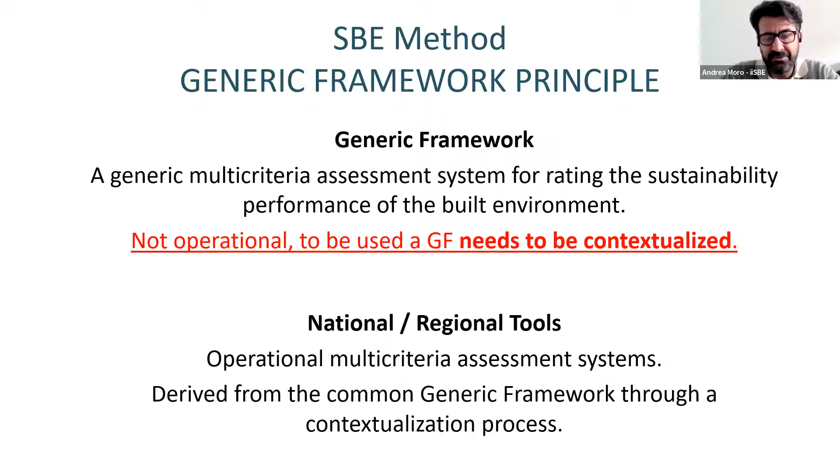So the principle is we start from a common basis, for instance the Sustainable Building tool global, and through the contextualization you can create local versions. This kind of tool, generic framework, has been the origin of several assessment systems used in Europe. For instance, the Italian public assessment system for buildings, named Protocollo Itaca, is the adaptation of SB tool to Italy. And today it is also a national standard. It is a UNI standard. UNI is the Italian standardization body.

We have also a Spanish version that is named Verde, coming from the same root. We have a version in the Czech Republic. We have a version in Portugal. There was also a version in Austria, for instance, and in other places. I told you it was a global approach, a global research process. For instance, the national Japanese assessment system, CASBEE, is based on SB tool, is a cousin of those ones.

So you start from the generic framework, and to create your specific tool, you have to carry out a contextualization process. Basically, the contextualization process can be reduced to three main steps. First of all, you select from the generic framework the assessment criteria that you want to apply locally. The generic framework contains 100 to 150 criteria and relative indicators, and you will never use all of them in your tool. So the first step is to select the ones that are the most significant in relation to your context. Usually an assessment tool is composed of 40, 50 criteria maximum. If the tool is too wide, too big in terms of number of criteria, you risk having a system not really manageable.

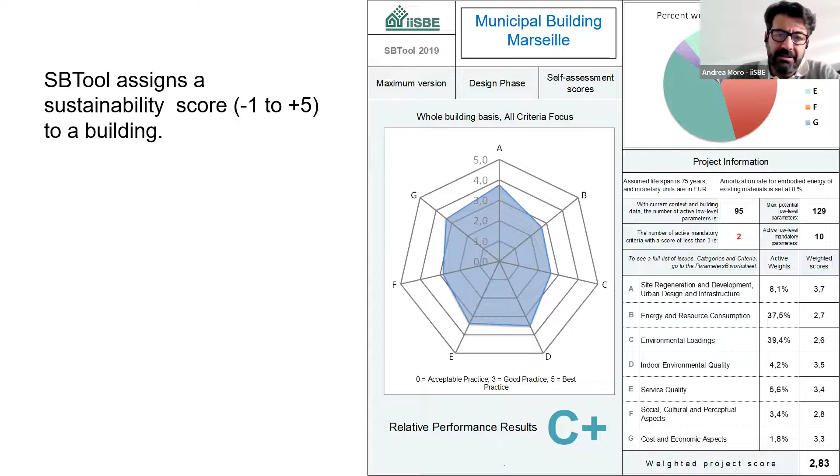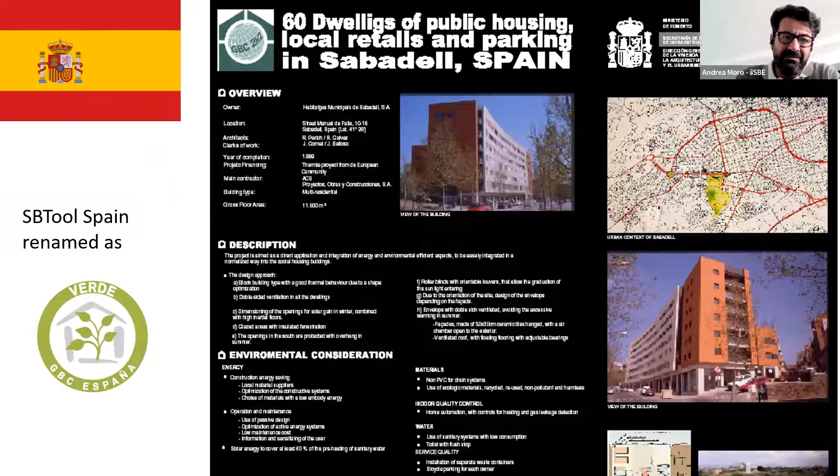And over time, the system has been tested in different countries, and also this methodology contributed to the development of other rating systems, like in the US with LEED, or in France with HQE, etc. So it has been tested in really many different situations, many different kinds of buildings.

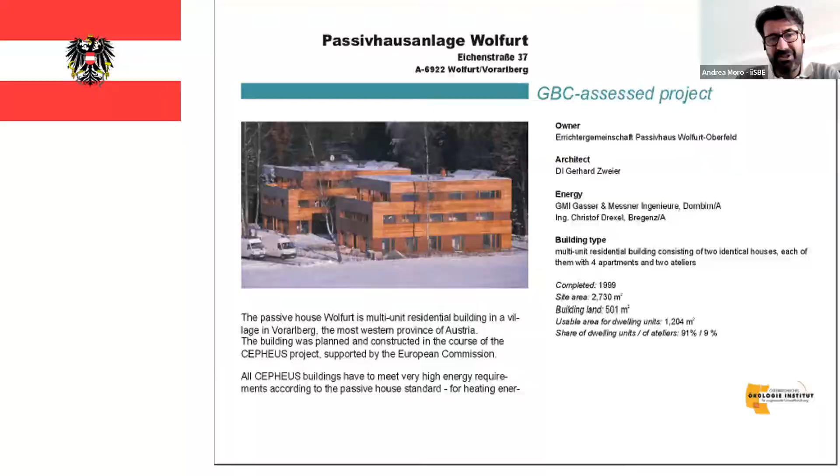So how does this methodology work? Basically, a generic framework, and we have produced in Sustainable Med Cities 3 generic frameworks: one at building scale, SB tool, one for neighborhoods, SN tool, Sustainable Neighborhoods tool, and one for cities, SC tool, Sustainable Cities tool. So each of those generic frameworks has a modular structure.

So the criteria, the assessment criteria, are grouped under different issues, and the issues are usually coded with a letter, A, B, C, D, etc. And issues represent general topics that are relevant when you are assessing the sustainability of the built environment. Each issue, so each module, A, B, C, D, contains categories. In the categories, we have criteria, and each criterion is connected with an indicator. The indicator is what you are going to measure for assessing the performance of the building, neighborhood, or cities.

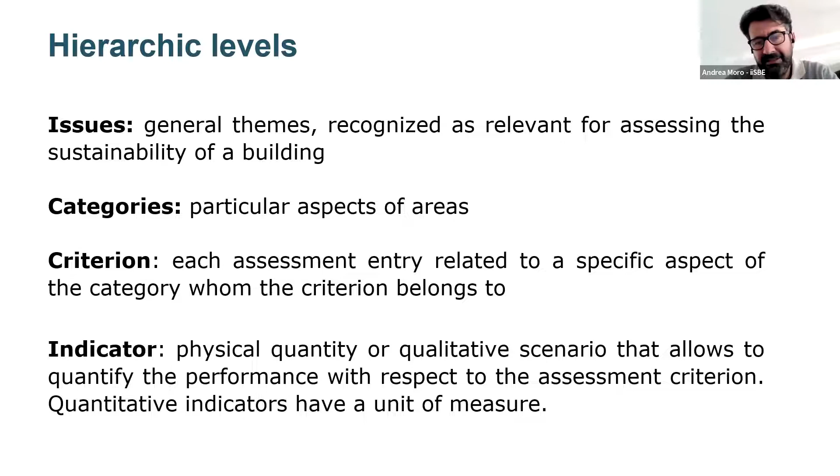For instance, a criterion could be daylighting, and the indicator could be the daylight factor, so the ratio between the quantity of natural light you have inside the building and outside. Or another criterion could be permeability of land, and the indicator is the share of the land that is permeable on the total area of the land, and so on. So this is a visualization of the hierarchic levels. You have an issue, you have several categories. Categories contain criteria, and criteria are all linked with an indicator.

In the building scale tool, we have 8 issues. You can see them in the table, dealing with the site, the energy, the environmental loading, the environmental quality, service quality, social, economic aspects, cost and economic aspects, adaptation to climate change. So each of the 8 issues contains different categories. And the different categories contain criteria. In total, there are 80 criteria in the building scale tool, and 17 key performance indicators.

What are the key performance indicators? I told you before that when you are producing your local version, you will select, for instance, the criteria among the 80 in SB tool, if we are producing an SB tool for a specific region. But of the 80, 17 are mandatory. So you must include them in your local version. This is because those 17 are significant, they are relevant for any context, and they are the ones linked to the global common challenges like the SDGs, the Sustainable Development Goals, or the carbon reduction goals, and so on. So they are surely relevant in any context. Then you can add as many as you want. 17 is the minimum number of criteria in a tool.

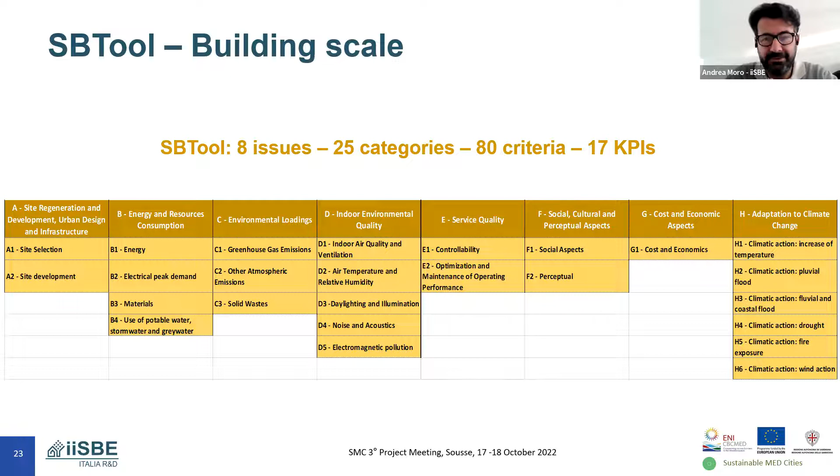The SN tool, the neighborhood scale tool, has in total more criteria. They are 133, 10 issues, 43 categories, 14 KPIs. Of course, we are at a higher spatial scale, and of course, the number of topics, themes is larger than the simple building scale. And then we have the city scale tool. Here we have 10 issues, 99 criteria, and 10 key performance indicators.

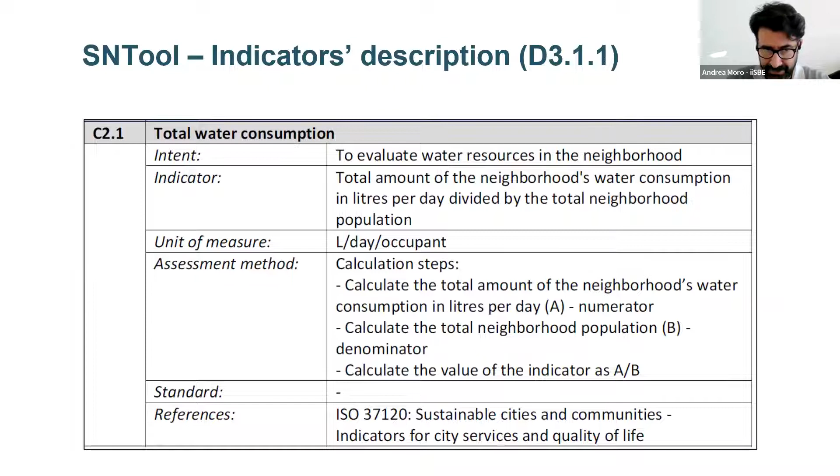For instance, if total water consumption is one indicator in your local SN tool, you are going to apply the calculation steps, and you are going to calculate the liters per day per occupant, that is the mean water consumption in the neighborhood. And the same you could do with, for instance, the concentration of PM10 or the final thermal energy consumption for building operation. You are going to calculate the values of each indicator that has been included in your tool.

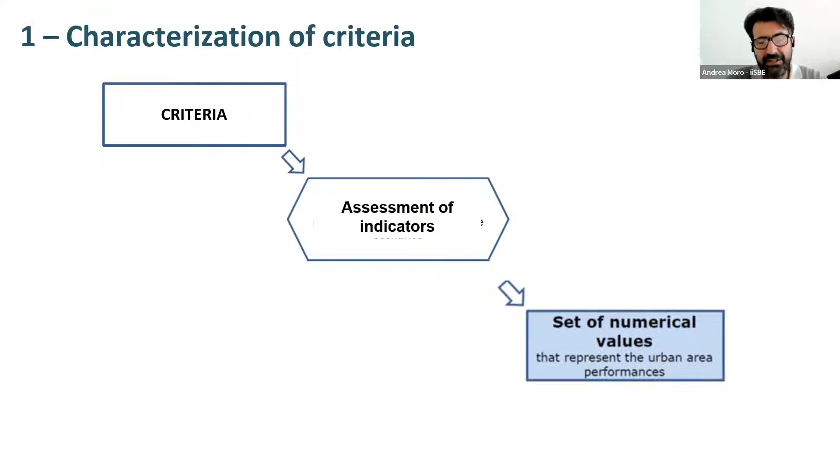And at the end of this process, you will have a set of numerical values. You will have kilowatt hours, cubic meters of water, kilograms of CO2. So you will have a set of numerical values with, of course, different units of measure. Like in this case, you have 3 different criteria with their indicators, and the final result is a percentage, days per year, kilowatt hour per square meter per year. So depending on how many indicators you decided to include in your tool, minimum the number of KPIs, maximum what you decided, you will have a set of values. And

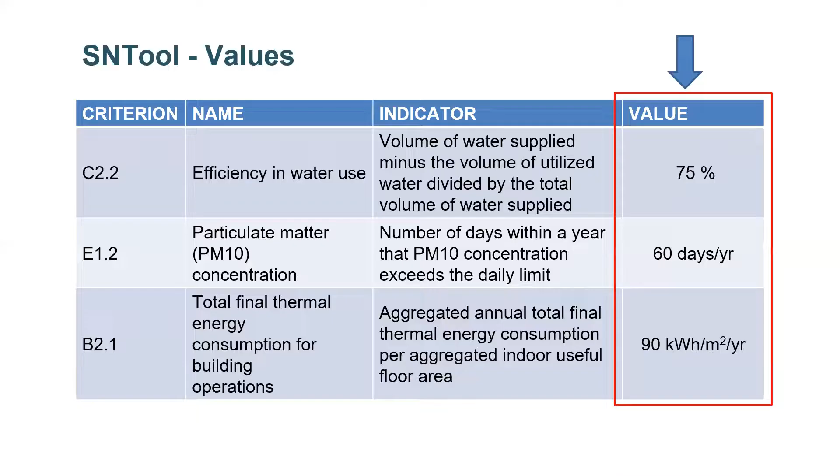Andrea, can you hear us? Yeah, okay, do you hear me now? Yes, now we can hear you. We had some issues. We couldn't hear you for a little bit. Yes, sorry, because it could happen again. Don't worry, because we just moved office this morning, and we have some little troubles with the connection. It's okay. I was just worried maybe it was my connection. So yes, of course you can continue. It is mine, but it could happen. So don't worry. I will be back in a few seconds.

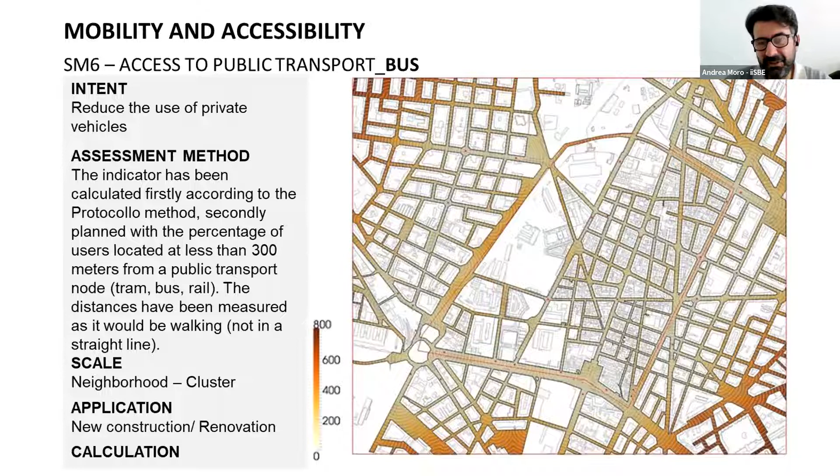The city in the world with the higher value is Venice, for instance, in Italy. Or it could be the proximity of transportation or stops, or, for instance, the mean value of the albedo in an urban area. So this is something linked to the heat island effect.

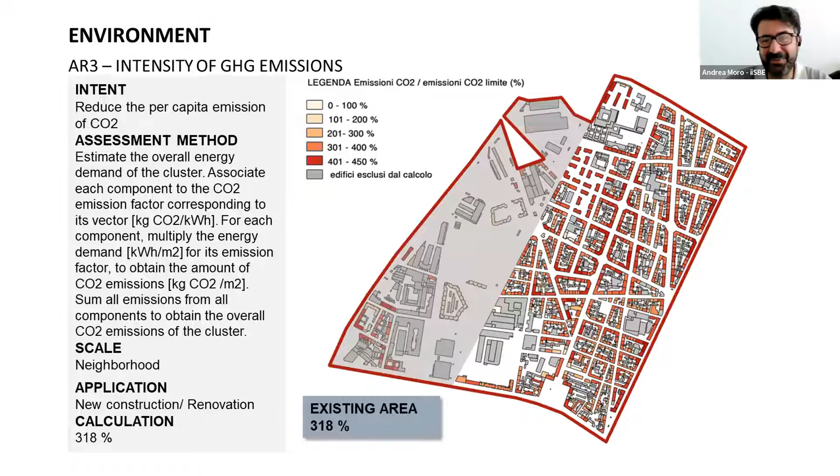These are a representation of the mean consumption of primary energy for heating in the urban area. These are the CO2 emissions. Again, the darker the color, the worse the performance for the different buildings. We can have also economic indicators and so on. So after the first step, we have a set of values.

Now it's clear that we are talking about a multi-criteria assessment system. So it means that we must combine the values of the single indicators to have a global evaluation. So the next step is normalization. It means that in this step we associate a score to the value of the single indicators. And the score ranges between -1 and +5, as I told before.

So what we are going to do is, let's say, rescale in this interval, -1 to +5, all the different indicators, associating a score, so eliminating the unit of measure. And we use normalization functions to do it. We have different kinds of normalization functions. Basically, high is better or low is better. Higher the value is better, for instance, the permeability of land, or low is better, for instance, the CO2 emissions. So it depends on the kind of indicator.

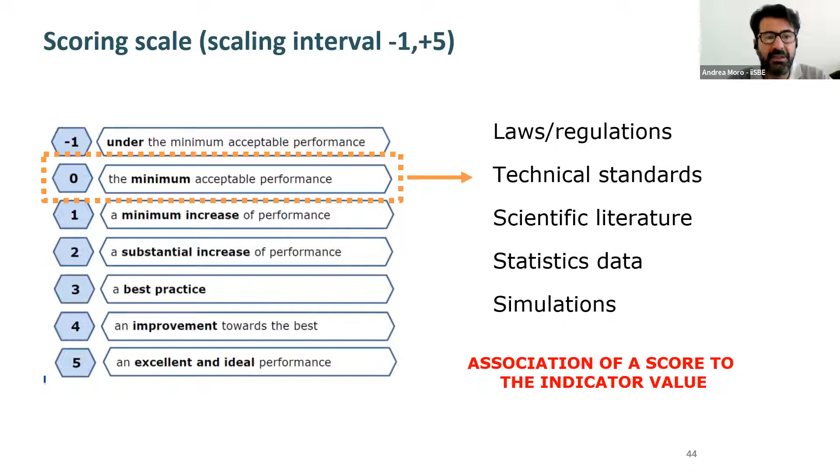And this is something that is done locally, because the minimum acceptable performance is defined in relation to your local laws, regulations, technical standards, maybe statistical data, or maybe scientific literature, simulation, and so on. So this is a very important part of the process, where you are setting the performance scale. Because at the end, the score that you achieve at the end of the assessment is the performance of your building or neighborhood or city in relation to the minimum local acceptable performance.

And as I told before, we have 3 different normalization functions. High is better, lower is better, but we also have a qualitative normalization function, applicable to the qualitative indicators. So this is, for instance, the representation of the higher is better normalization function, where on the horizontal axis you have the indicator's value, and on the vertical axis you have the score, -1, 0, 1, 2, 3, 4, 5. So when you are defining the scoring scale for an indicator, you just say, this value of the indicator corresponds to 0, this value corresponds to 5, and so you have a linear normalization function.

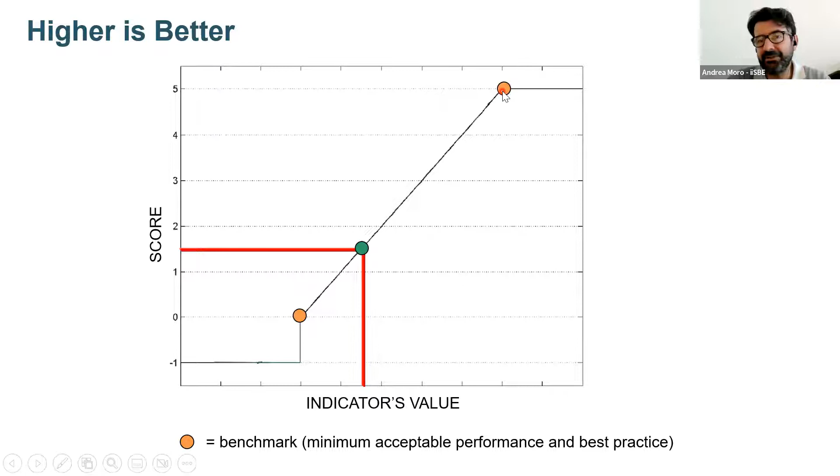And in the moment you calculate the value of the specific indicator, through a simple interpolation you will get the score. So using this normalization function, you will associate the score to the value of the indicators. If the value of the indicator is worse than the level 0, you get a -1. If the value is better, in any case you will have a flat function here, so you will get 5 points. It's not possible to take more than 5 points.

This is an example with the connectivity of the street network that I showed before, where the level 0, the minimum acceptable, is 50 intersections per square kilometer. The optimum is 180. This is the typical number of intersections in the center of a medieval town in Europe that is usually pedestrian. So if, for instance, you calculate in the first phase 90 intersections per square kilometer in your urban area, you get a score of 1.5. These normalizations are done automatically by software, as I will show you later. This is the lower is better function. In this case, it is the opposite of before.

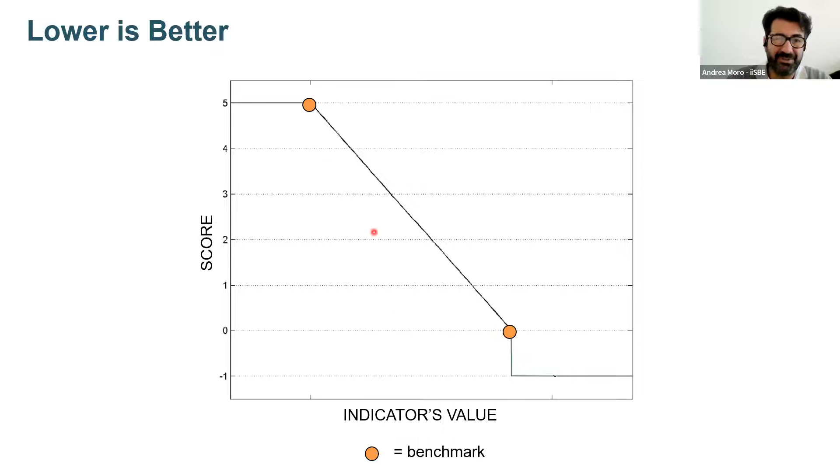So you define a value for score 0 and a lower value for score 5, again with a linear function. This could be the case for energy consumption, if the indicator is the energy consumption of the building or neighborhood in relation to the maximum allowed consumption.

This is usually defined by an energy regulation, so you can have a situation like this: 0 is 100 because the minimum acceptable performance is that you consume the maximum allowed, and maybe you decide that 5 is 25%. So if you consume 25% or less, you get 5. In your evaluation, say the indicator's value is 60, through interpolation you are able to calculate the score.

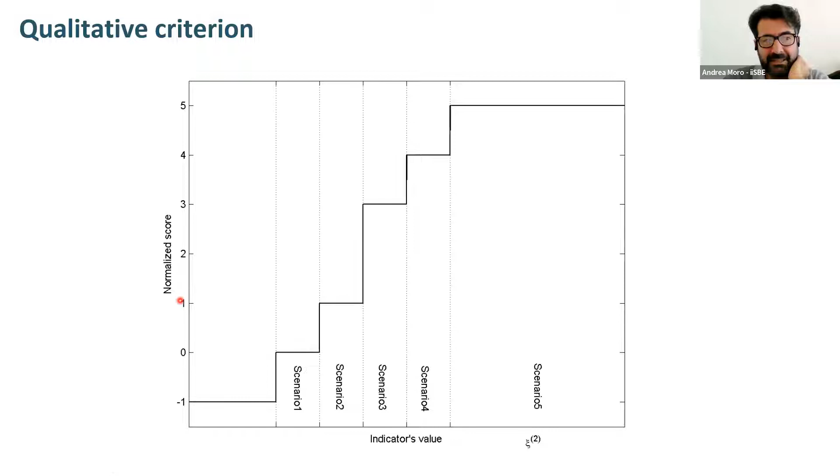This is the case for qualitative indicators, which are described in terms of scenarios. You just have to identify which scenario better fits your situation and assign the corresponding score. This is much less objective than a quantitative evaluation with indicators, so we try to minimize the number of qualitative criteria in the frameworks.

Finally you have the aggregation phase, the third step. First we calculated the value of the indicators, the characterization. Then we normalized the value of the indicators, and now we have a set of scores. Now it's time to aggregate the scores to produce the final score, the final evaluation.

This happens through weighted sums. Here we have a new element coming into play, the weights. So in this phase, by assigning the weight, it will be possible to aggregate step by step the different criteria.

The aggregation takes place in three phases. First, you aggregate the criteria to determine the score of the category. Then you aggregate the scores of the categories to get the score of the issues. Finally you aggregate the issues, and then you are able to calculate the final global score.

So this is in principle how it works. For instance, in this example we have a category, B3 Land, that includes 7 criteria: B31, B32, B33, etc. In the normalization phase, we defined a score for each of them - for instance B31 could be 1.5, B32 could be 2.4, etc. Now it's time to calculate the score of B3.

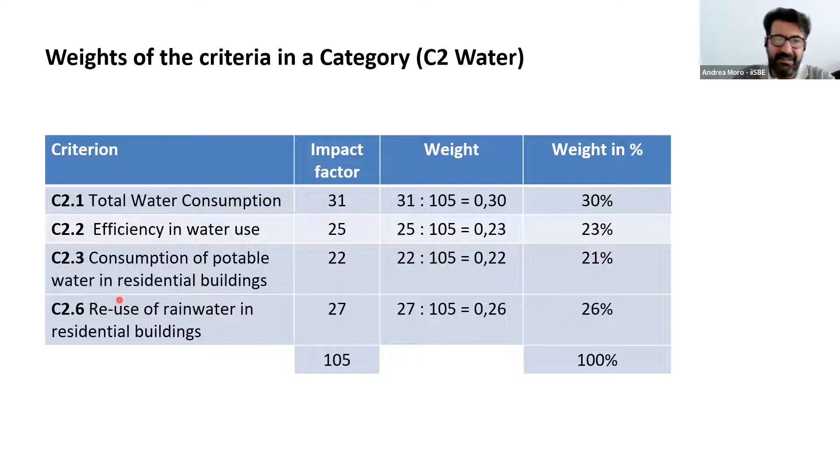When we move at the category level, at this point, how it works, basically, you assign a priority score directly to the different categories. So what is the importance of water infrastructure in regard to water consumption, in regard to effluent management? The priority ranges from 1 to 5, where 1 is low and 5 is maximum. In this way, you are able to set the weight of the different categories.

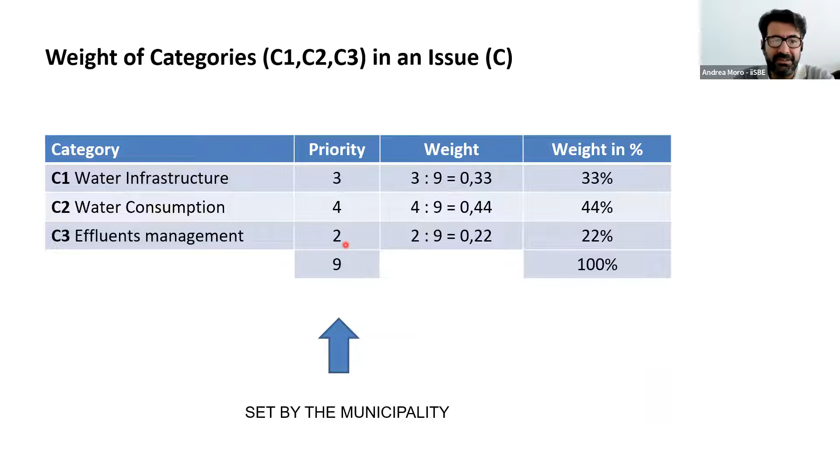So it is the city, the region, for instance, that sets the priorities, because priority is something local. It's up to the user of the system to decide the relative importance of the different issues. So here we also have a very political influence, because when you set priorities, you are taking a political choice. But of course, your choice depends on your local context, your local priorities, or your local urgencies.

So each user, in our project, each municipality, is defining its own set of priorities for the issue level or the category levels, and also the cities are deciding if an adjustment factor is applicable to the criterion level.

Concerning the scoring, let's start from the category level. This is a category, the water consumption category, C2. There are, for instance, 4 criteria selected by the municipality. 1, 0.5, 1.3, 0.1 are the scores calculated in the normalization phase. These are the weights defined, and then you just calculate the score times the weight for each criterion, so you have a weighted score. You sum the weighted scores, and you have 0.73 as the score of category C2, water consumption.

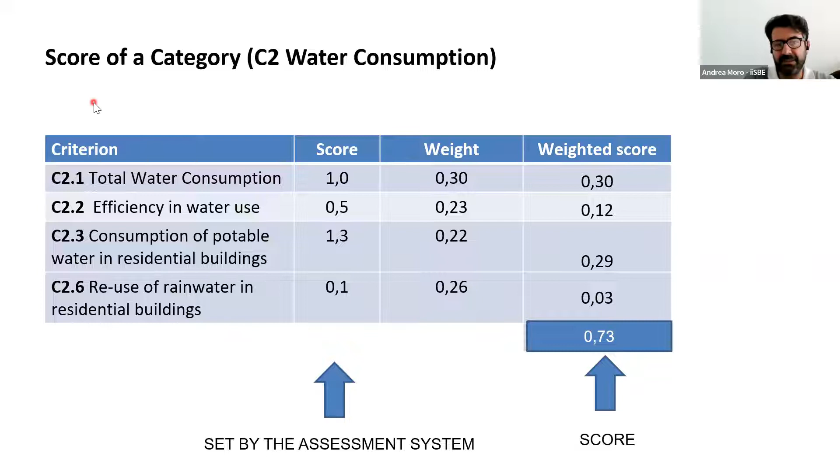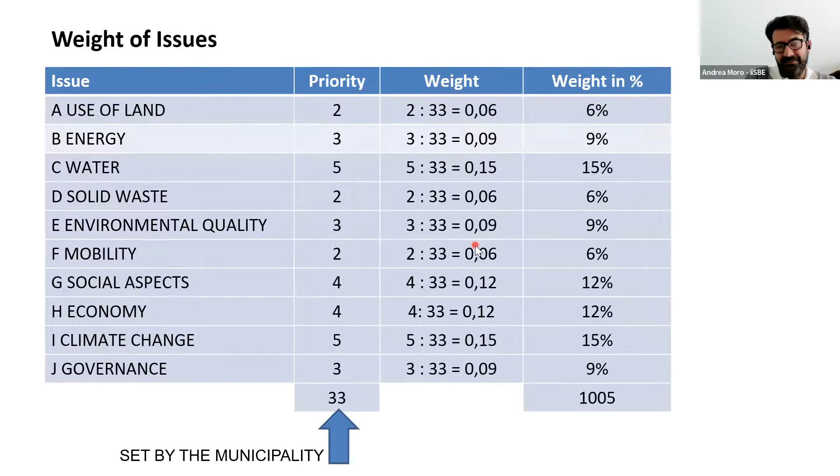In the same way, you will have the scores of the different issues. Each issue has a weight, which we have defined before. Then you have score times weight, giving the weighted score. You sum the weighted scores, and you have 1.8. This is, for instance, the level of sustainability of this neighborhood with regard to the benchmark, weight, and criteria that you have decided to use.

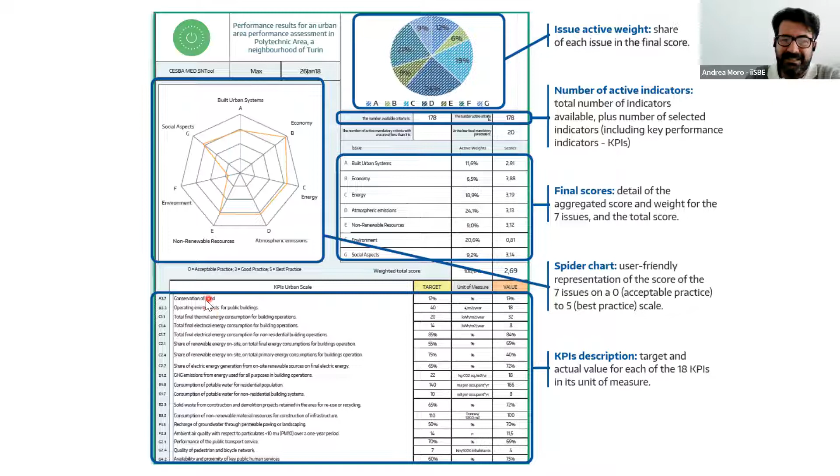Also, these steps are performed using a web tool that makes it very easy to do, so in the end you get the final score. You have an output with the scores of the different issues. This list shows the KPIs, but I will come to the KPIs in a minute.

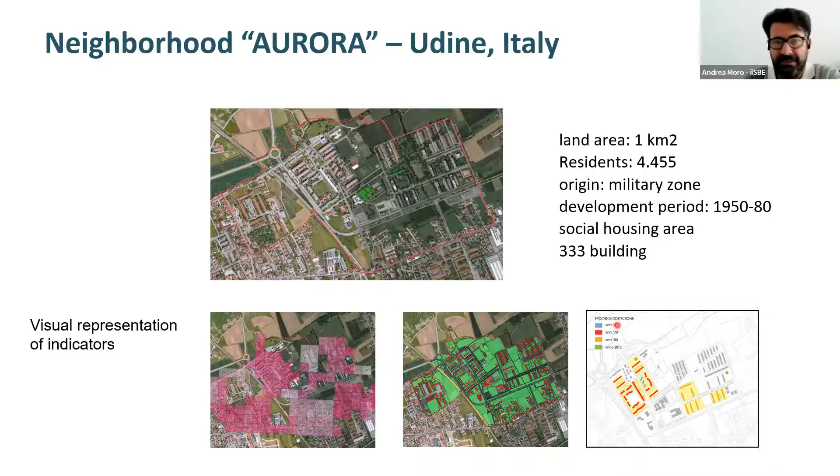In the CESBA MED project, the system has been applied to several different neighborhoods to identify the best retrofit options. I'm going to tell you about the use of the tools in this decision-making process in the second part of our meeting. The tool has been very useful for cities, for instance, to evaluate the actual performance of a neighborhood, to fix performance targets, and to evaluate possible alternative scenarios for improving the sustainability of the neighborhood.

This kind of process that I described for the contextualization phase - the selection of criteria, fixing the benchmarks, and then fixing the weight priorities - can be done through a participatory approach. If it's only the municipality or some decision-maker that decides the criteria, priorities, and benchmarks, this is a top-down approach that isn't really good. In our projects, we push for a bottom-up approach, through what we call project committees.

Here you see a couple of pictures. Through this participatory approach, the selection of the parameters has been based on public criteria. Also, the definition of benchmarks and priorities were fixed through public consultation, so that in the end, the assessment system really reflects the priorities of the community living in the neighborhood.

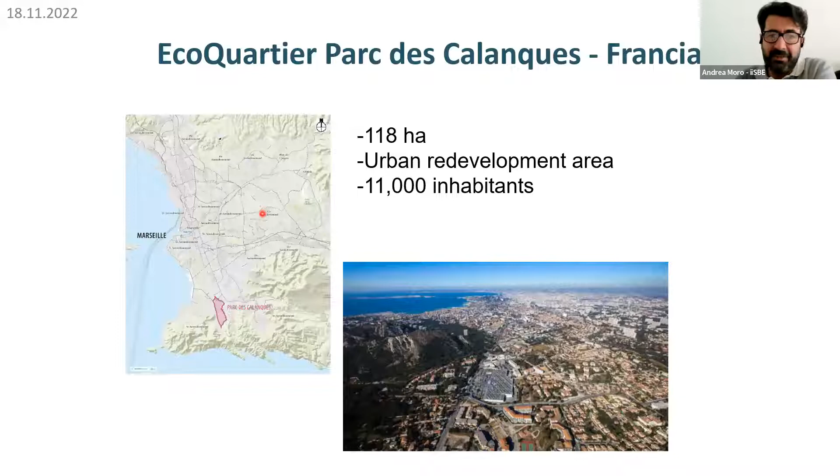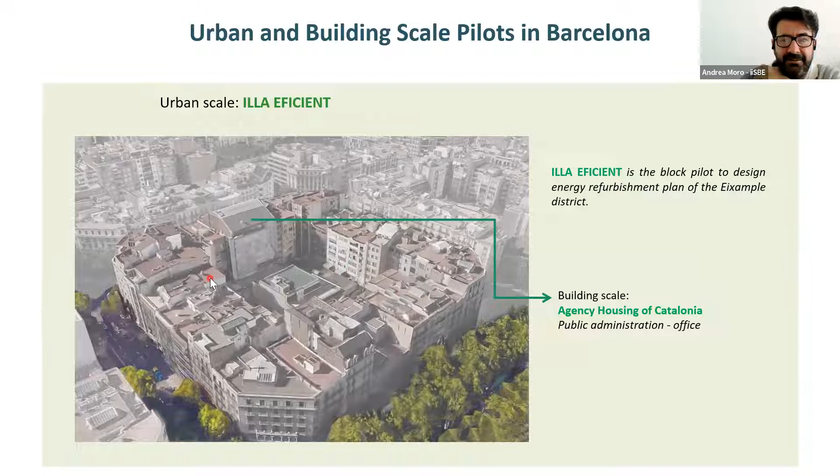In Barcelona, we had an application at a small urban scale, also on a cluster. In this case, it was a block where there is the Agency of Housing of Catalonia. The tool was used to identify the strengths and weaknesses of this block.

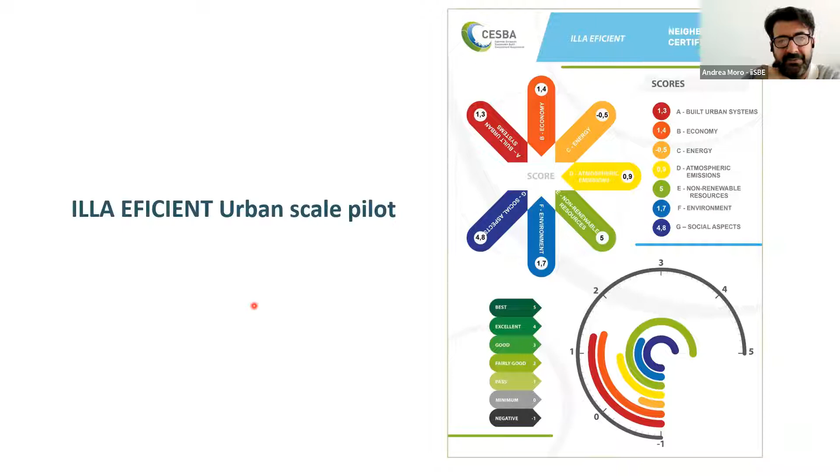And also to define a pilot concept for the improvement. Another case study was in Catalonia, Sant Cugat del Vallès, where the municipality applied the system on a huge urban area. They were evaluating two possible scenarios, and for each scenario they evaluated the results in relation to the targets fixed by the municipality.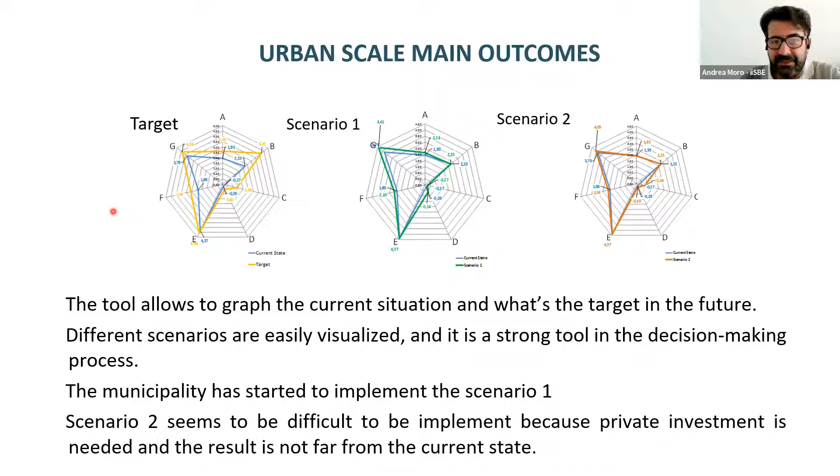So these are very powerful tools for supporting the decision-making of a municipality in urban retrofitting. At the urban scale, the complexity of decisions is very high - the variables are many, the stakeholders involved are many, so it's very complex. You need a multi-criteria system like this one to support your decision-making process, providing objective, reliable information to understand the situation and which scenario can have the best impact.

We also had an application in Greece, in the SESMA-MED project, and also in the Sustainable Med Cities project, the NECBC MED one, the current one. In reality, we are using the systems combining the building and the urban scale.

So we ask the different municipalities to prepare a local version of the SB tool for the buildings and the SN tool for the neighborhood, then to select a neighborhood and one or more public buildings within it, and then to define a concept for the retrofitting of the neighborhood that creates a synergy between the building and the neighborhood scale.

Because, of course, the building-by-building approach isn't winning. You could have a bad building, like a school built in the 70s, that is very weak - you can't improve it too much. Maybe you should demolish or reconstruct it, but maybe you can't. At that point, maybe you can exploit possible synergies with buildings in the same neighborhood that maybe can transfer

renewable energy produced by solar panels or PV panels, or create synergies not just in the energy field - it could be in transportation, water, or whatever - so that the building can really reach a higher performance with this urban scale approach.

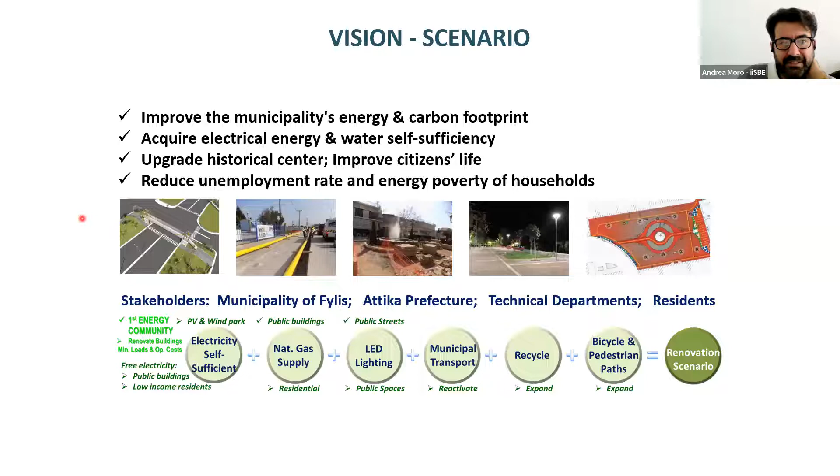So in this case, each partner works on different scales, always defining through the analysis the current state, identifying the weak points, and then finding the best retrofit scenario.

Before opening the floor to your questions, I hope I tried to be as clear as possible. I know it's a complex topic, but if we go

to the platform - this is the beta version of the assessment system. Basically, if you decide to use this assessment system in your project, you will have credentials to enter this system. You can at this point open any of the modules. Just a second, I have to log in. Okay, here we are.

So once you enter the system, here you are able to visualize the available generic frameworks. We have here the ones produced in the SESMA-MED project, for instance, but we also have the new ones produced in the Sustainable Med Cities project. SMC stands for Sustainable Med Cities.

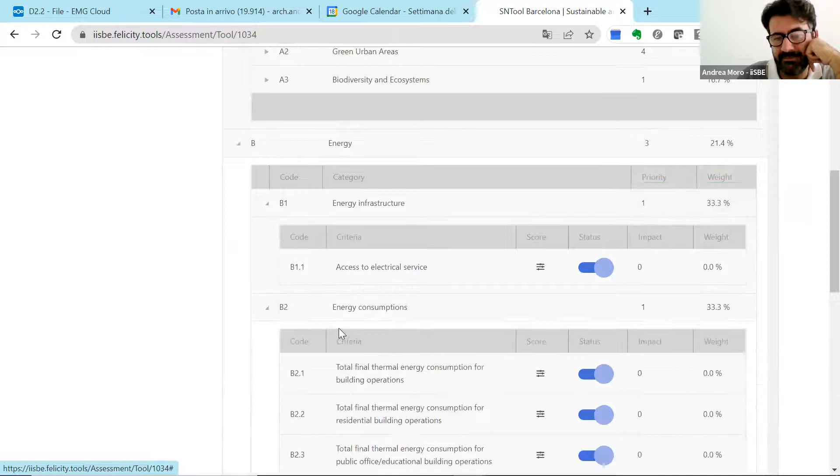No, it's possible. It's possible to eliminate a category in the moment you are not activating criteria. I can open any of the categories here, and you can visualize the criteria inside them. So I have to deselect the criteria in order to remove the category? Yes. Okay. And this is the second exercise.

So when you are inside the category, like here, we are inside B2, here you decide which parameters you want to include or not. And also again, here you can introduce those impact values that we have calculated. So it was the intensity, the duration, the extent, if you want to use a more objective approach. If not, you can just have another co-creative approach. You can decide just to use 1 to 5 again as priority, and you can assign here the different priorities.

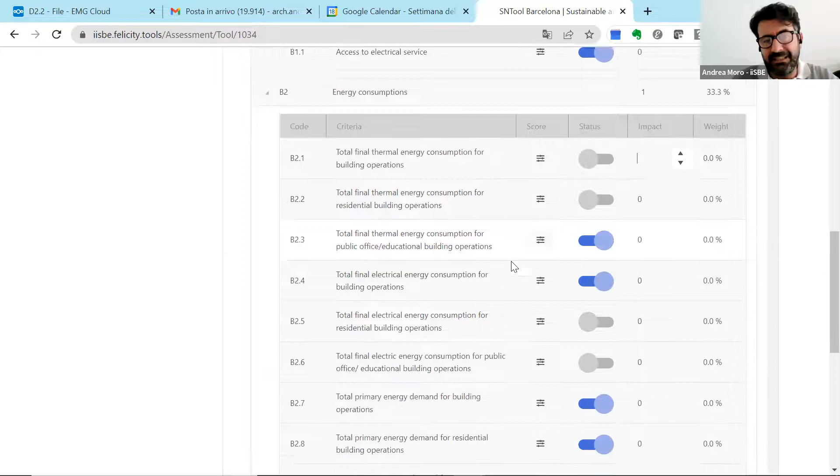We have defined this approach for this level, the level of criteria, that tends to be more objective, leaving more subjectivity to the higher levels, like the categories and the issues, where it's also easier to manage those co-creation approaches because it's more simple. When you are at the level of the criteria, maybe you find several criteria in the same category. It could be more difficult to understand how much one single criterion is more or less important than another one. It's much easier when you are comparing categories, and easier still with the issues.

So yes, here because we don't really have the numbers for some of the criteria, and some are really not so characteristic per area. For example, some municipalities may not have the knowledge for one of these criteria and the impact in order to be included. So in this case, we could remove it from our selection and go forward with the assessment process. Yes.

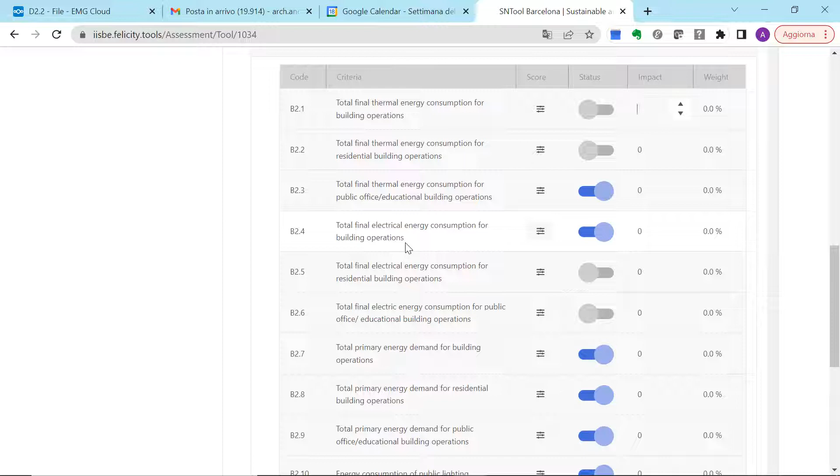And sorry, I wanted to say, because you mentioned that the impact should be either a prioritization from 1 to 5 or a given number, could we mix these two cases? For example, in one criterion, we may have the exact impact or the exact percentage, but in the other one, only the priority. Yes. You can mix, but you must use the same approach for the criteria in the same category.

So, for instance, if you have the impact values for the criteria in this category, you can write 35, 45, or whatever. In the case you are in a category where you don't have the impact for any reason, here you can use 1 to 5. But the important thing is to use 1 to 5 for A1.1, A1.2, 1.3, 1.4, 1.5, not mixing the two ranges of values for the criteria.

So the range must be the same, not the value, sorry. The range must be the same. And yes, the same system should be used in order to produce a consistent kind of value for the priority, as you can say.

Yeah. Yes. Okay, understandable. Thank you. No, you're welcome.

And then if you click on these three bars, it opens the benchmarks. So here you can write the value of the indicators associated to score 0 and score 5. In this case, for instance, it is the availability of green urban areas. It's a percentage of green areas on the total of the neighborhood. And so here you should write what is for you level 0, so the minimum acceptable. This could be, for instance, an urban standard, and what could be the ideal level.

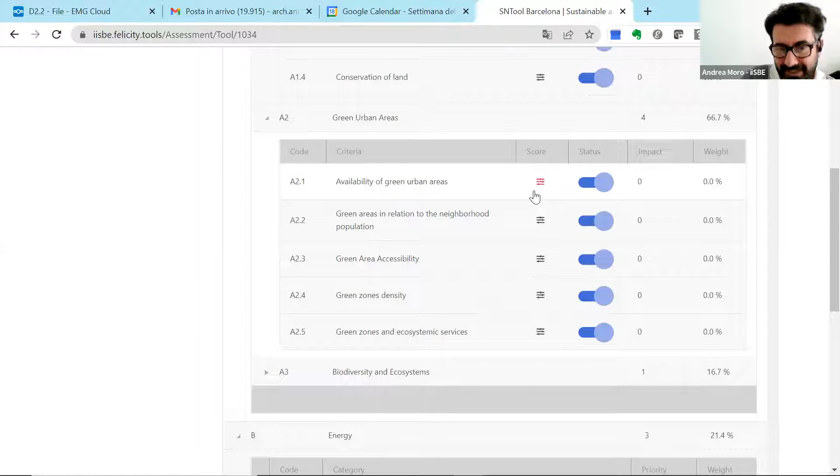But this is defined locally. So now we are defining some guiding values that you can use, but you must always check if the guiding value is the right one for your specific municipality. So this is the part of the tool that is used for creating your local version of SB tool, SN tool or SC tool. So for buildings, neighborhoods, or cities, you define the priorities, and from priorities come the weights. You select or deselect the parameters that you want to use, and you fix the benchmarks here.

And then you have the final stage. The final stage is the assessment, where you can add a new assessment, selecting the tool that you want to use. I open one complete assessment. At the end, you get this kind of result that now you are used to. So you get all the scores for the different issues, the weighted score, the total score. Then you can also visualize the score of the single categories.

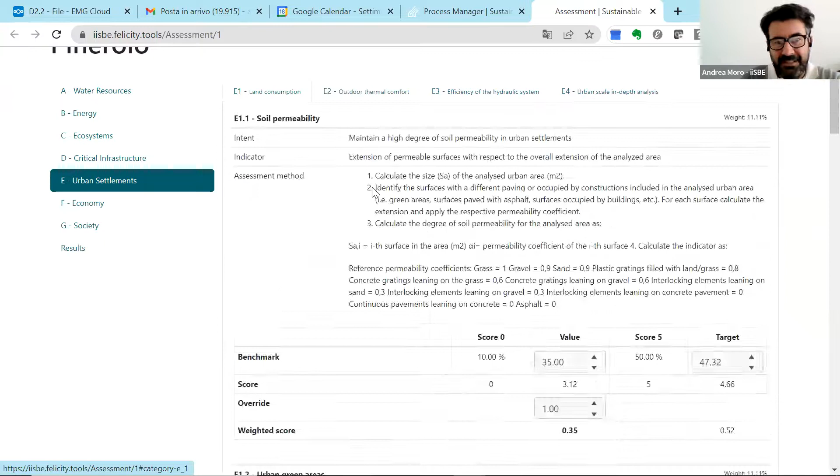And of course, you are able to get those scores because in the evaluation, you have introduced the value of the different indicators. For instance, we are now in E. It is one of the issues. Category E1, E2, E3, E4. Let's take E1, and then you have again the intent, indicator, assessment method, and here you have the benchmark. Score 0 is 10%. Score 5 is 50%. You write here the value of the indicator that you have calculated. So you remember the normalization function. So introducing the value of an indicator, you get the score.

And you can also define here a target score. So what is the ideal score that you would like to reach? No, sorry. What is the ideal value of the indicator that you would like to reach after the intervention? So after the retrofit of the neighborhood, let's say 45%, then it shows you how far you are from the target score, showing the actual score, and then you get the weighted score. It is the score times the weight of the criterion. So you can follow this kind of assessment, introducing the value of each indicator.

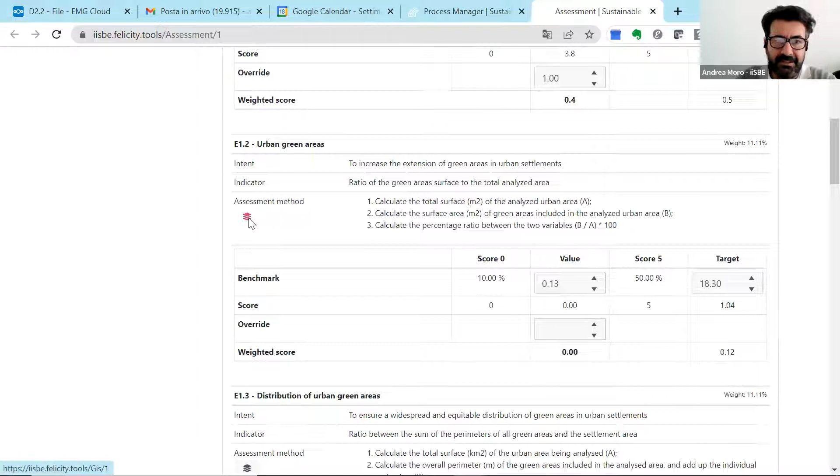We have also studied the possibility to introduce GIS data. For instance, these are GIS data of a municipality. Now I am importing the territory belonging to the municipality. It has a strange shape. This is the land of a municipality. I can, for instance, import the green areas in this territory.

I can import, for instance, the roads, and I can import the footprint of buildings. Here we are. Buildings are not really visible. Okay. Here we are. And you see that automatically the system is able to calculate some indicators that could be difficult to calculate by hand or with other systems. And clicking update assessment, those values are imported into the evaluation that I opened.

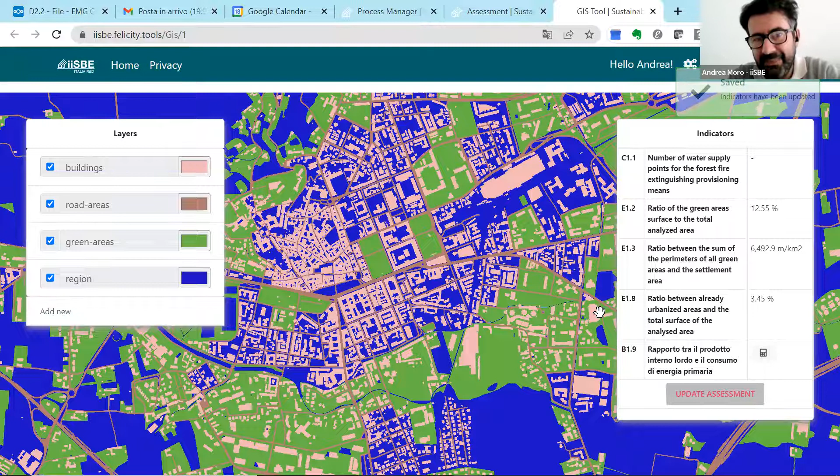So this, for the city scale or urban scale level, is something very, very useful. If the municipality has GIS data available, they can be connected to an indicator, and then the municipality is able to calculate the value of indicators automatically. It's really very useful.

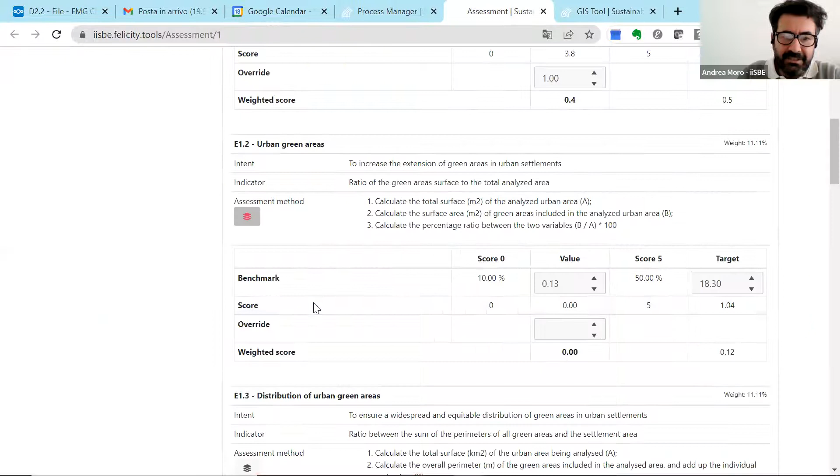And so at the end, all the indicators with this icon can be calculated using the GIS module, and then once you have completed the introduction of all the indicators' values, you can get the final results, and you can also export all the different data in an Excel file.

This is something new, because in CESBA MED we didn't have this web tool. In CESBA MED we were using Excel files, and so it was a continuous, let's say, issue to deal with the macros in Excel, because this selection of criteria was really complicated to manage in Excel, hiding or showing rows and so on.

In the new Sustainable MED Cities project, we have defined this web tool. In reality, the deliverable is coming in some months, in March. This is the first beta version that we are providing to the partner cities. We have 3 cities in Sustainable MED Cities: Sousse in Tunisia, Irbid in Jordan, and a small city in Lebanon, Muqtara. But it's a very important step ahead, because it makes this system really usable and easy to use.

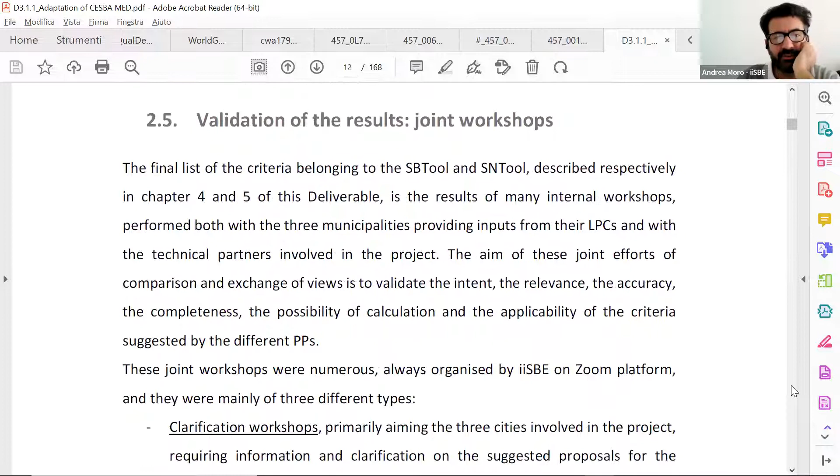And so basically, this is the overview of the tools and the methodology, and everything is described in a deliverable that, of course, we can provide you. It has already been published, at the end of September. In this document, the first part is what we changed with regard to the CESBA MED system, and then starting from chapter 3, you find the description of the methodology.

I just show you the description of all the steps: characterization, normalization, aggregation. Everything I showed you through the slides is described step by step, so that you can go through the methodology, the normalization functions, the weighting system, priorities, how it works. So it's a sort of manual, but it is easier than you might imagine.

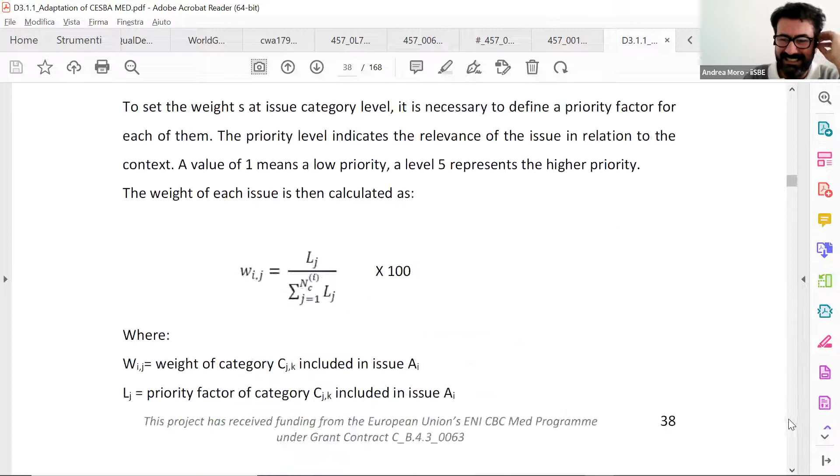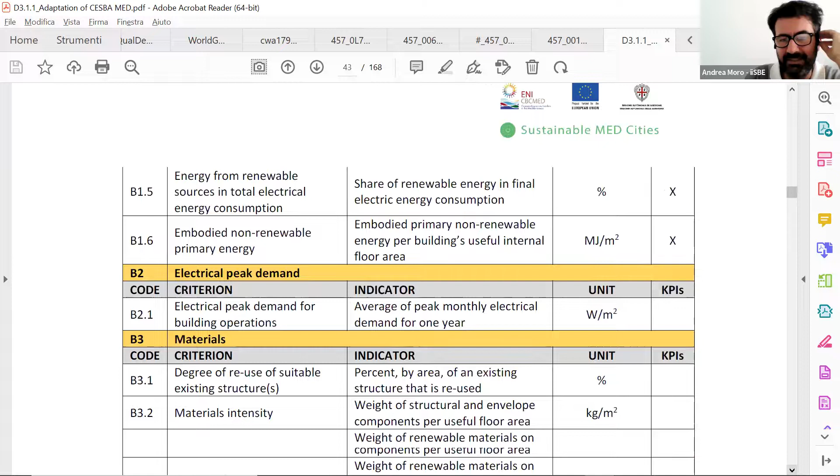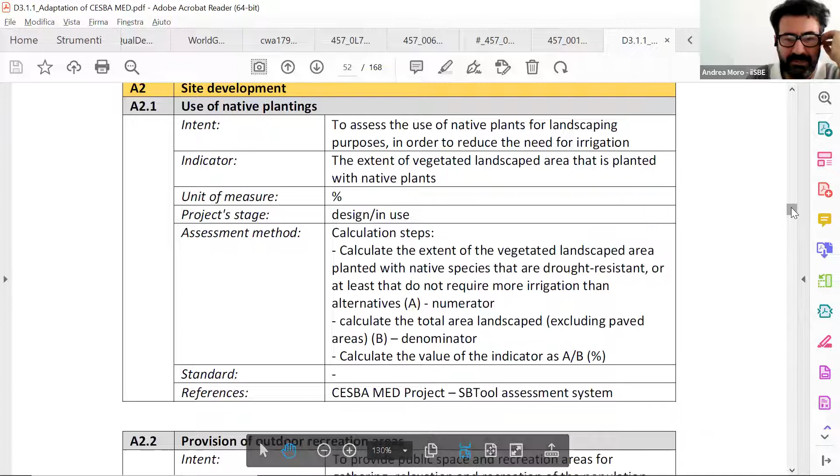And then in the second part of the document, you find the description of the generic frameworks: the SB tool, the SN tool, and the CT tool, where you have, first of all, the list of all the different criteria for each generic framework. This is the building scale, for instance. And then, criterion per criterion, you have the tables describing the assessment methodology and the indicators, explaining how to proceed for verifying them. It's quite a big document because there are some hundreds of indicators used in the whole system.

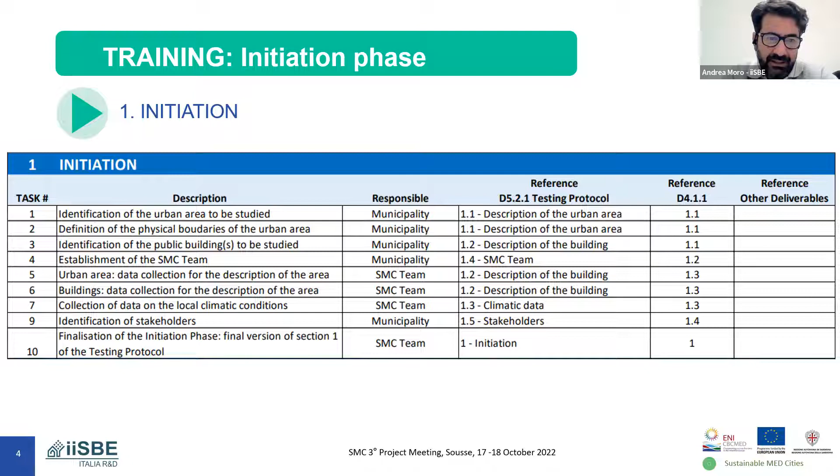We have defined a testing protocol for the decision-making model, so that the decision-making model has been disaggregated in a series of tasks that will guide the municipalities and the experts in the correct use of the decision-making process. Each task has a number and description, who is responsible, and also a link with the different deliverables that are used in the decision-making phase.

The first step, of course, is to select the urban area that will be studied, and the public buildings in it that will also be studied. It is necessary to clearly define the physical boundaries of the urban area. The boundaries can be defined on the basis of geographical proximity of buildings, the ownership, for instance a social housing neighborhood, the socioeconomic context, an administrative boundary, since cities are usually divided in sub-administrative areas, or maybe the period of construction or the energy supply infrastructure. It's up to the municipality to decide the principle used to set the physical boundaries of the urban area.

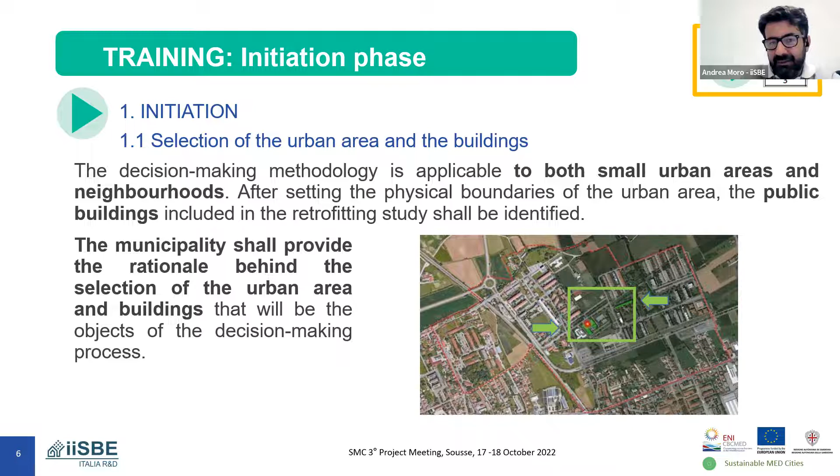And here you have, for instance, the boundaries defined by a city. There is a red line here in the picture that marks the physical boundaries, so you really have to draw the line. And these buildings in green, 1, 2, 3, are, for instance, the public buildings also included in the study. Of course, in the project, we asked the cities to provide an explanation about why they have selected that area and those buildings, and what is the rationale behind it.

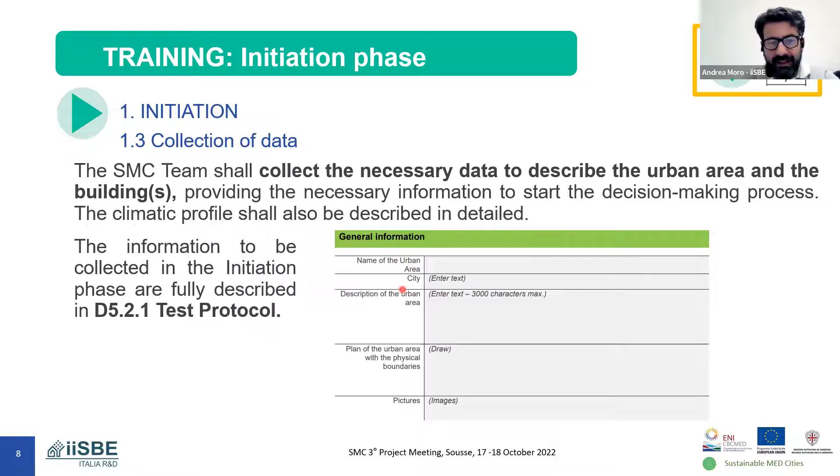Okay, so also part of this step is to set up a working group, the team that will carry out all the tasks of the decision-making process. And there should be a coordinator of this working group that will be the main interface with the municipality. Also part of the initiation phase is to collect information about the urban area and the buildings, to describe them. Could be physical properties, characteristics, or other. And for each of those tasks, we have prepared a template that has to be filled.

It's also important in this phase to identify the stakeholders to be involved in this decision-making process. It's important to identify them from the beginning, because we are promoting a co-creation, participatory approach. So the stakeholders are the ones that will participate in this co-creation. They can support the municipality in identifying the targets, the weaknesses of the neighborhood and buildings, and also to take into account multiple approaches. Typical stakeholders can be the various departments of the municipality, local agencies, other local authorities, experts, service providers for waste collection, water, energy, etc., interest groups, maybe associations of residents, and maybe also external parties.

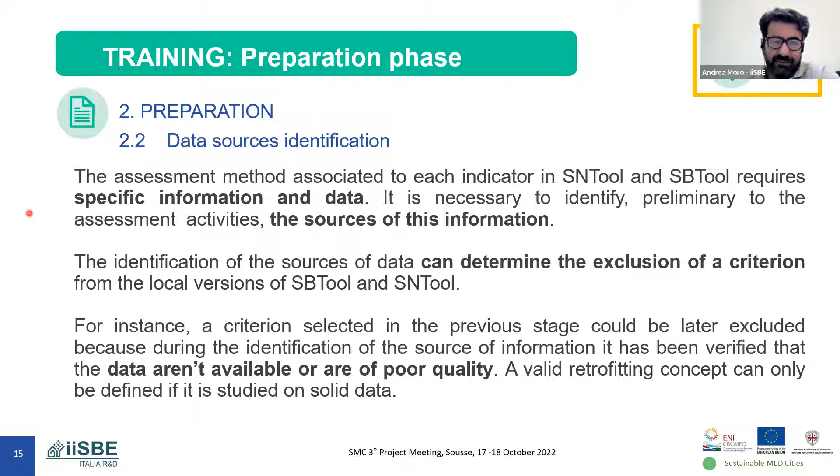So it's a matter of availability of data and also quality of data, because the reliability, credibility of an assessment with those tools is also linked to the fact that the information used is valid, is good information. It's important to identify data, data providers, data sources, and as we were discussing before, the availability of GIS data is something that could be very useful for accelerating the data collection process.

The providers of the information could be very different, could be regional, municipal departments, public agencies, statistical offices, building owners. You can find information through certifications, utilities, maybe you can also use some public free sources like OpenStreetMap or Google Earth. Maybe it's possible to carry out on-site inspections, or you can find databases maybe produced by other research projects. So the data sources can be very various.

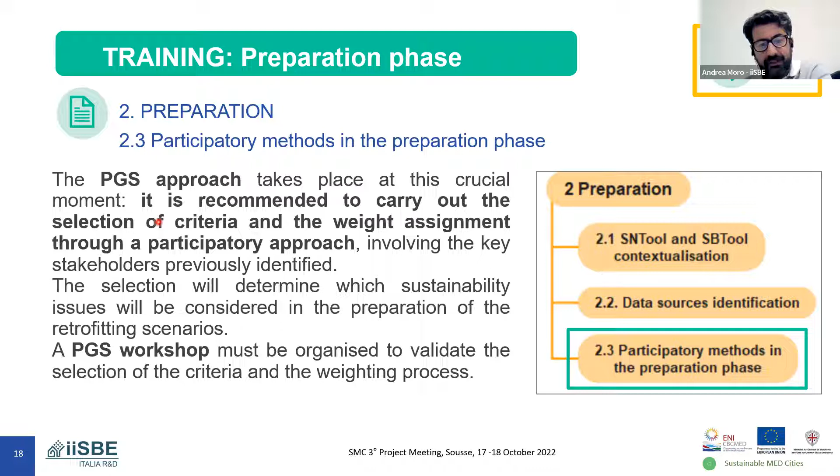And in this phase, let's say the process suggests to organize a workshop to discuss the selection of criteria and weight assignment. Third phase is diagnosis. The first thing that you do if you don't feel well is to go to visit a doctor, and the doctor visits you and provides a diagnosis. What is the current state of your health? This is the same thing.

We are using SB tool, SN tool, to understand what is the current state, health of the neighborhood and the buildings that we have included in the study. So we want to understand what are the current conditions, because this is very important to identify the weaknesses and also to identify the potential to improve. Also to understand the gaps in awareness and the opportunities for actions, because they are not always really clear, and also to identify possible synergies that can be exploited to improve the situation.

So basically, this phase is very important because it's the base to fix also the targets to improve the situation and to create the basis for developing the scenarios, identifying the weaknesses. Again, there are a series of specific tasks to be carried out.

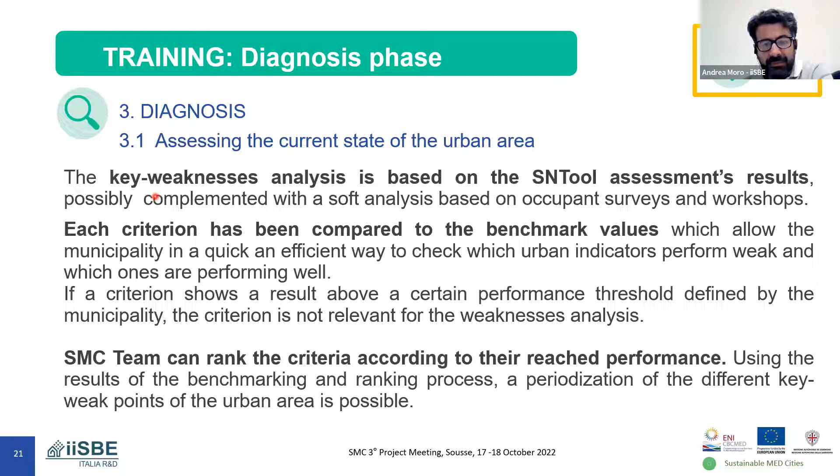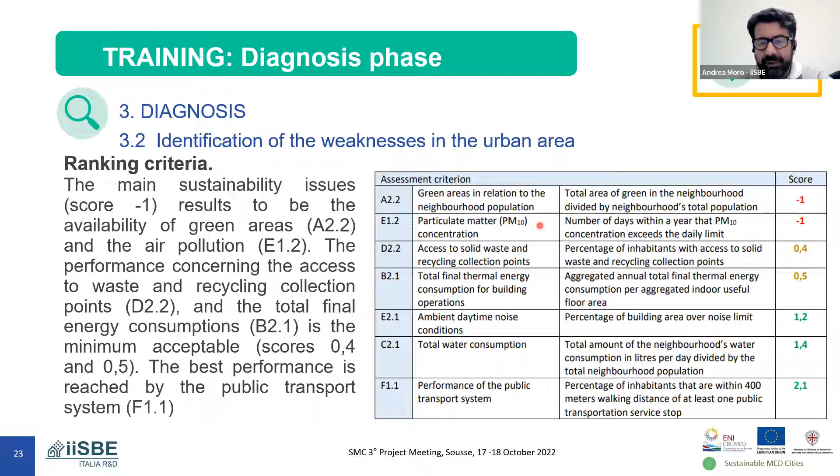So through this ranking, you are immediately able to identify problems and issues. Of course these are calculated values, and we suggest also carrying out surveys and interviews among the inhabitants in the area, because it's possible to identify sustainability issues that are not evaluated through the indicators. So the combination of this qualitative evaluation, the interviews, plus the quantitative evaluation scores, can give you a complete picture about the state of the neighborhood.

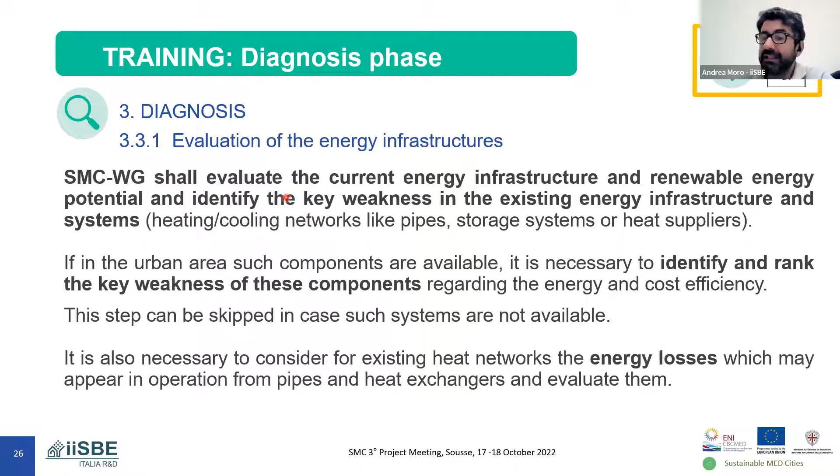It's also important in this phase to analyze the current state of infrastructures, basically energy and water. So to understand, concerning water, if there is sufficient provision, if the water is of quality, what is the level of losses, and what is the level of water treatment. And concerning energy, it's important to understand if there are weaknesses in the energy infrastructure, and the potential for use of renewable energies in this case.

In our methodology, we described some methods for evaluating the current state of the energy infrastructure concerning the heating and cooling networks, the electric demand, and the evaluation of the energy potential of renewable sources.

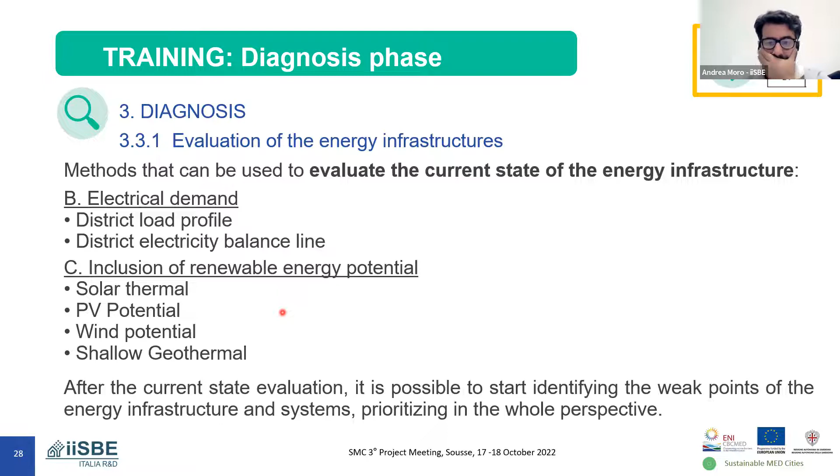At this point, you of course carry out this analysis for both the neighborhoods and the buildings included in the study. So you will use SN tool for the neighborhood, SB tool for the buildings, and in this case you can also organize a workshop to understand the point of view of inhabitants and occupants of the buildings.

The final result will be a SWOT analysis, which is the base for the definition of the scenarios later. Through this diagnosis you can identify the strengths of the neighborhood, the weaknesses, but also the opportunities for improvement and the threats that can create problems in the future.

And then basically the final output will be a summary report that can also be discussed with the stakeholders.

The fourth stage is the strategic definition. Now we have selected the area and the buildings. We have defined the local tools through the contextualization of the transnational versions of SB tool and SN tool. We have prepared a SWOT analysis.

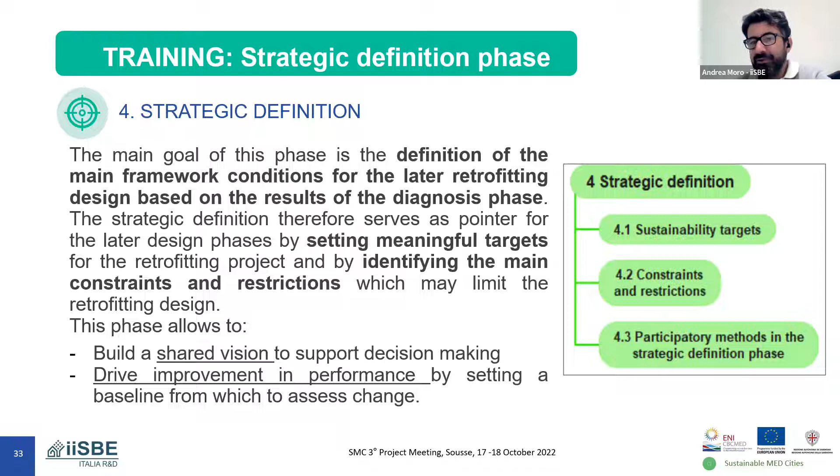Again, several tasks need to be performed, and the first step is to define targets. If you remember when I showed you the web tool, we were evaluating the score for a criterion. There was the possibility to introduce a value of the indicator as a target.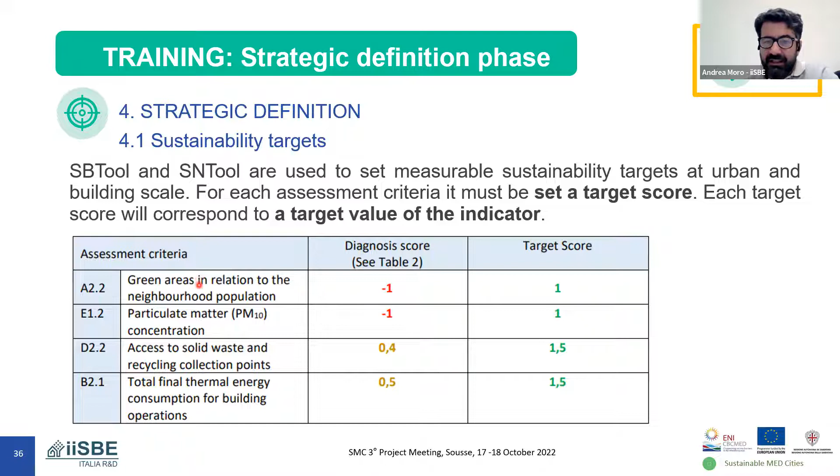And of course, as you know, the target scores are related to a target value of each indicator. So these are the values that will guide the preparation of the scenario. The measures included in the scenario should allow reaching that target value. And these are verifiable target values, because they are indicators, so you can calculate them.

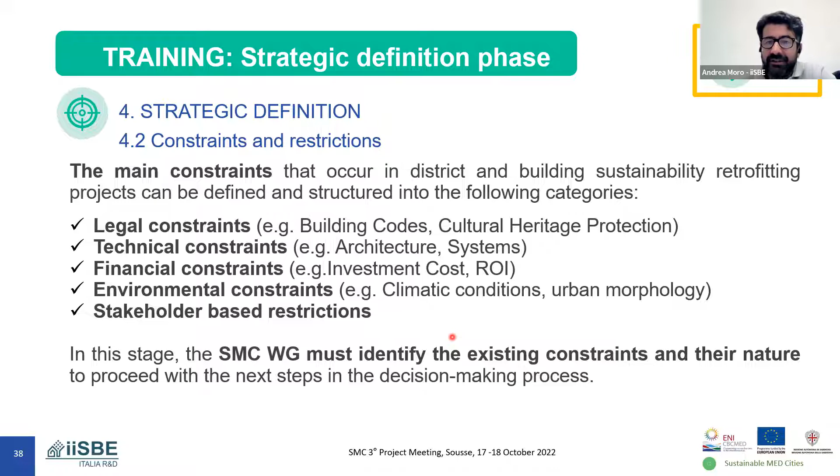Constraints: you can't do everything you want, because there could be legal, technical, financial, environmental constraints, and restrictions based on the willingness and opinions of stakeholders. Legal constraints could be linked to building codes, for instance, or cultural heritage protection. Maybe in a certain area you can't install PV panels on roofs because it's a cultural heritage area, and this is forbidden. So in your scenario you can't include PV panels, or there could be financial constraints, like the cost of the solutions, and so on.

So also in this phase, it's possible to organize consultations and workshops, mainly to define the targets for the retrofitting project. What are the targets that the community would like to reach?

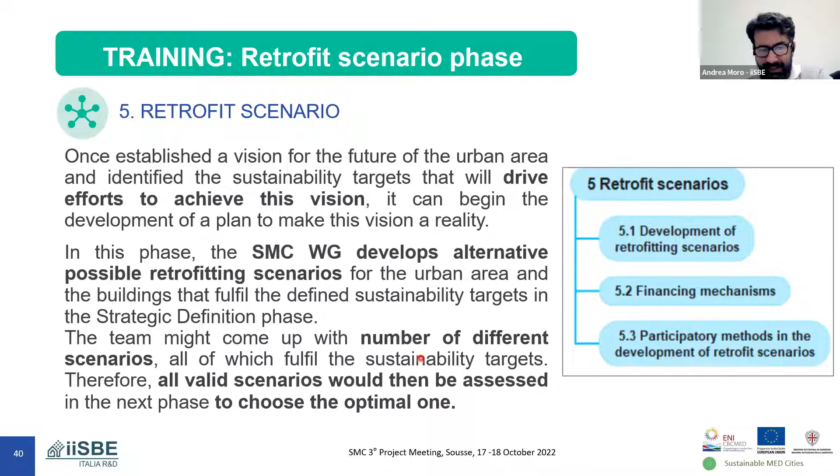And now we have to define the scenarios. This is a very challenging step, because in this phase different scenarios will be defined, and then one of them will be selected. Scenarios are alternative packages of measures, and this is a design, a planning exercise to be carried out.

Again, we have tasks specific to this phase. We can have scenarios, packages of interventions that foresee physical interventions, technical solutions, but there could also be soft interventions, something about knowledge, awareness raising, participation, etc.

Of course, it's important to integrate both kinds of actions. This is a co-creative exercise, because the retrofitting scenarios should be developed in cooperation with the stakeholders. And all the buildings should be considered as a connected global system, combining building scale and urban scale approach. Interventions should address the weak points identified in the previous steps, and could be related to very different fields like energy, water, use of land, mobility, health, social and economic issues, and so on.

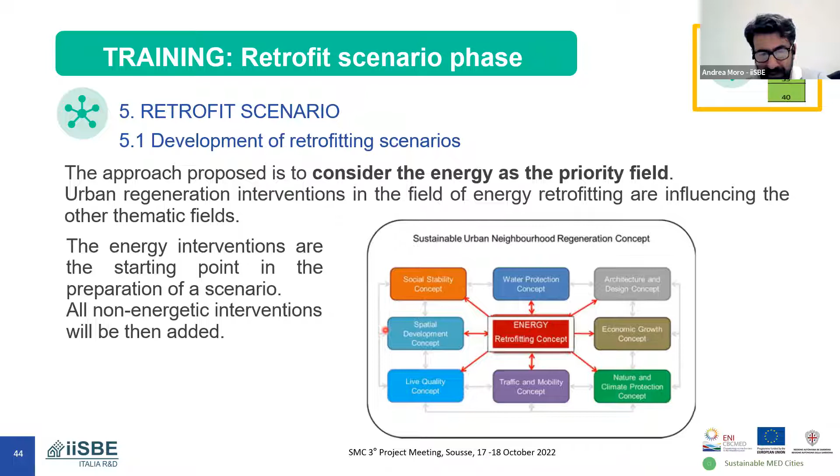The package should start from the identification of the best package of measures to improve the energy performance, and then move on to the other thematic fields, so non-energetic interventions.

To define a scenario starting from the energy field, it's important to identify and optimize the possible interventions at urban level and building level. Then you add the non-energy related interventions. Then the possible business models and financial schemes have to be analyzed, and then you complete the scenario through a validation.

Of course, the starting point are the weaknesses identified in the diagnosis phase and the targets set in the previous stage. And this is an iterative task where the team analyzes the result of a scenario up to its optimization. SBTool and SNTool are again the tools used to understand what kind of results each package of measures can achieve, to measure how much the scores are improving with regard to the diagnosis phase.

We also realized that it's almost impossible to have an automatic optimization. So the dream - I push a button, I get the scenario - no, this is impossible, because in any case you will be limited, since you use a repository of solutions. Maybe the repository is not updated, maybe not all the solutions available in your context are in the repository, and the automation of the packages is also limited in the number of variables it is able to consider. So here it's really a planning and design exercise.

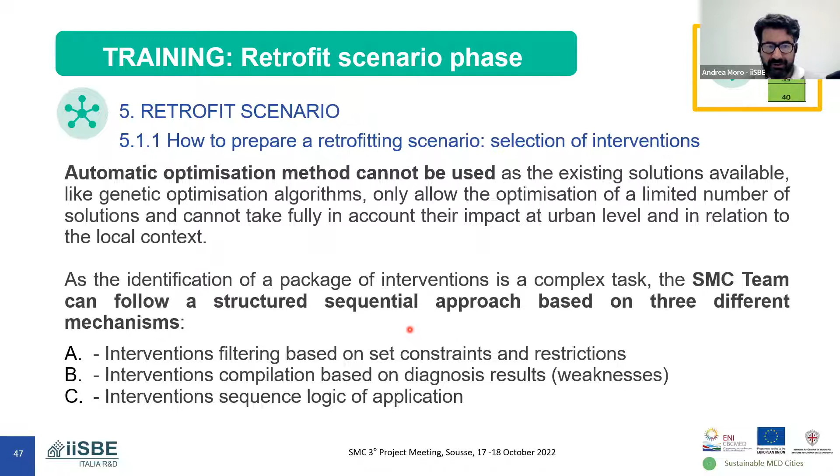You also have to understand what kind of financing solution could be applicable. This is another filter, because it's nice to define an optimal scenario, but if you don't identify how it can be implemented in practice, what are also the financing or business models necessary, this will remain just an academic exercise and will never reach reality.

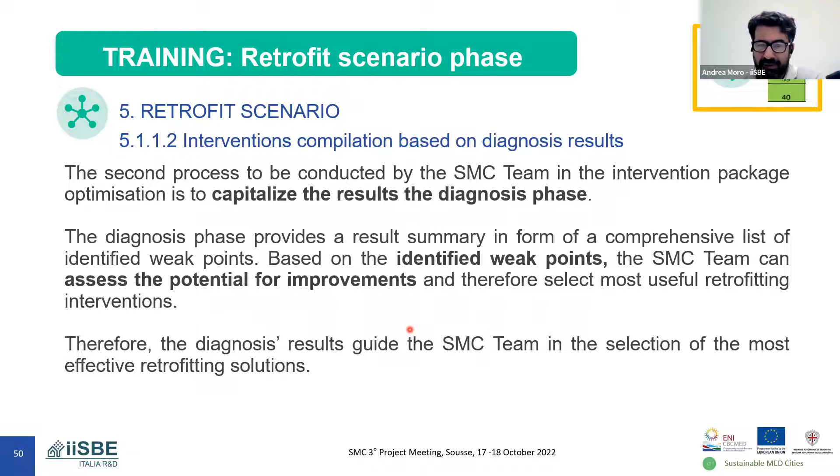So basically, you have to exclude all the interventions that are not suitable or not applicable for the buildings in the urban area. You have to focus on the solutions that can improve performance in relation to the weak points and the targets set by the municipality. Then you have to apply a logic of application of the interventions, starting from the energy.

First of all, you should start to create your package of measures, starting from the ones that allow you to reduce energy consumption, meaning reducing energy needs. Then the interventions that can improve the efficiency of the energy networks, and then the use of renewables. So first you reduce the demand, you improve the efficiency, and then you cover the remaining needs using renewables. Here you have the interaction between the building and the neighborhood.

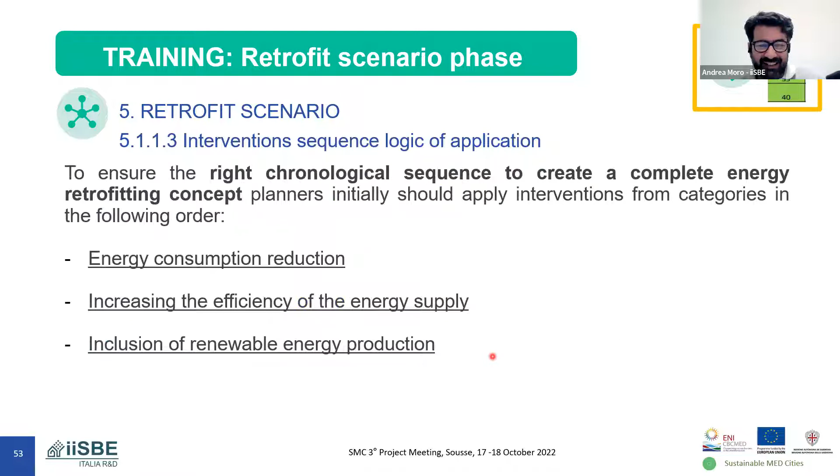Okay, so this is the chronological logic. You have... maybe I lost you. No, now we can hear you again. Okay, we lost you for 2 minutes. Okay, so this is the creation of the starting point for... sorry, I have some issue. Do you hear me again or no? Yes, we can hear now. Okay, sorry, okay, again, we can start.

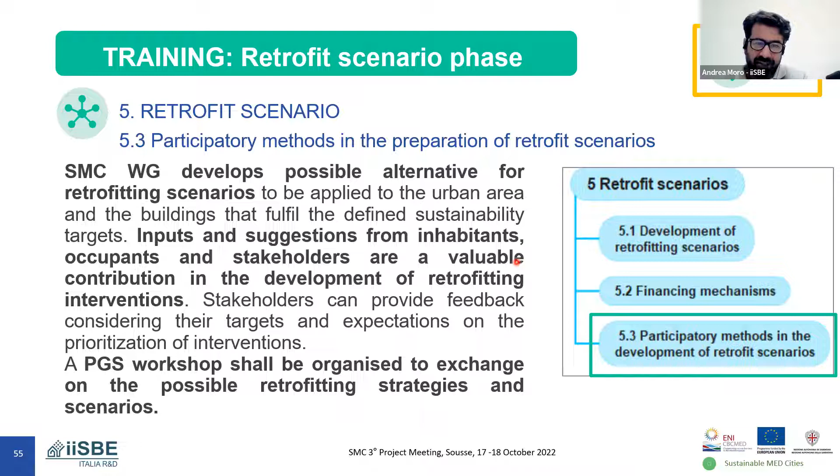The creation of the scenario: the energy intervention should follow this logic, from consumption reduction to energy efficient supply to renewables. Then you add the non-energy interventions. In any case, for each scenario, you have to identify the possible business models and financing mechanisms: loans, grants, energy performance contracting, co-investment, tax benefits, and so on. Finally, you have to discuss the scenarios again with stakeholders to identify the best one.

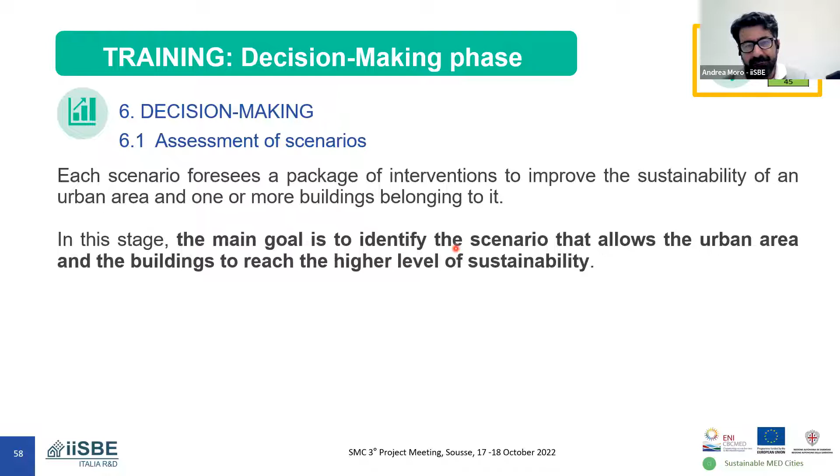Then we have the decision-making phase. Now you have to decide what is the best scenario to be implemented, and again you will use SB tool, SN tool for this decision-making step. Many tasks here. Your goal in this phase is to define which, among the different packages of measures, is the best one for your situation. So basically, you apply SN tool and SB tool to the urban area and to the building scale.

Assuming that the intervention has taken place, what will be the performance, the potential performance after the intervention for the urban area and for the buildings? So you are calculating potential scores depending on the kind of intervention.

At this point, you will have, for instance, 3 scenarios, each foreseeing some measures. So you say, okay, the neighborhood after scenario 1, a package of measures, after implementation will have a score of 1.3 for the urban area, building A will have 2.1, and building B 2 points. You do the same for scenario 2 and scenario 3.

At this point, it's possible to rank the scenarios. You combine those scores, 3 scores for scenario 1, 3 for scenario 2, and 3 for scenario 3, into a global overall score. You have to decide what is the weight of the 3 scores in your evaluation.

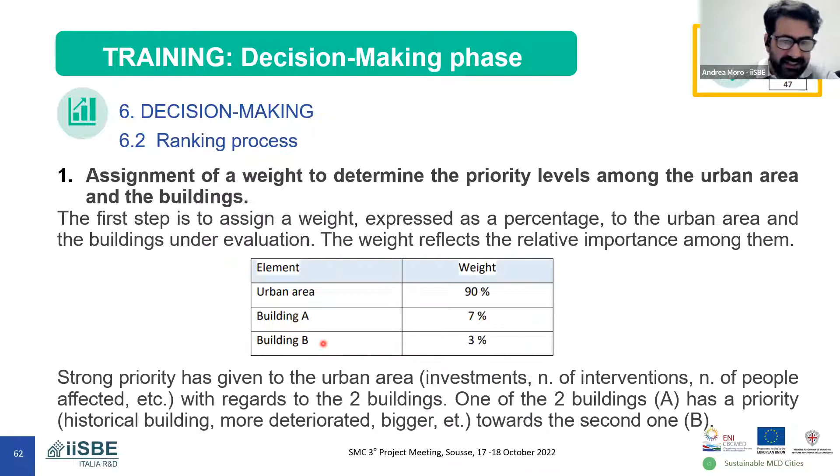For instance, we can assume that the urban scale score is more important than the building scale, and maybe building A is more important than building B because it's bigger, or it's historical heritage, or for any reason. So you can do a weighted score. This is, for instance, the score of scenario 1: SN tool was 1.3, building A 2.1, building B 2.0.

You apply the weight and do a weighted score, so scenario 1's total score is 1.4. You can do the same for scenario 2 and scenario 3, and at the end you will have the overall scores and can rank the scenarios. Scenario 2, in this case, is the best one that allows me to reach better performance. Of course, all three scenarios have already been validated from the financial and business mechanism perspective, because they are feasible, possible to implement in theory.

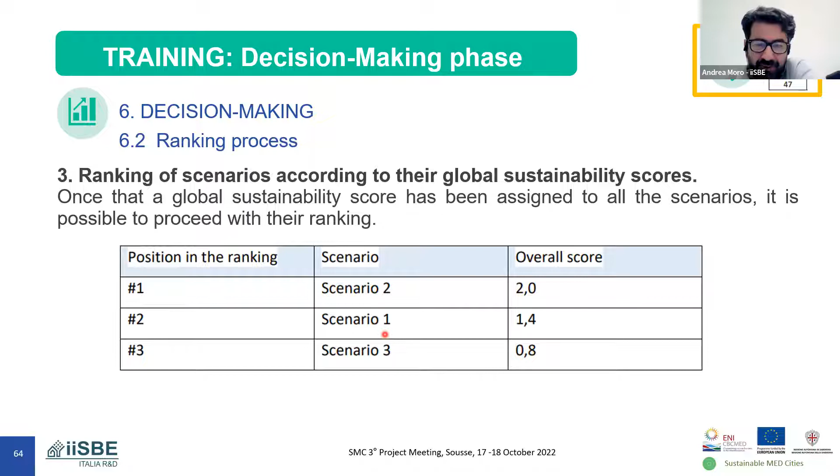At this point, in the final phase, you select the optimal scenario. You can also take into account expert judgment, not quantified aspects, surveys, whatever. So it's not that you have to take this ranking as the final one, but maybe for any reason, scenario 1 could take the place of scenario 2 as the first, if it is the case when you have inputs that are, let's say, indicating the second scenario as the best one. That could be not only quantitative. So the last word is always in the hands of the municipality.

The whole process is to produce guidance for a municipality to take the right decision, considering the real situation of the neighborhood and buildings through the diagnosis, fixing measurable targets, exchanging with the stakeholders, evaluating different potential scenarios, ranking the scenarios from the point of view of target, and then taking into account also the not quantifiable issues. At this point, one scenario will be selected.

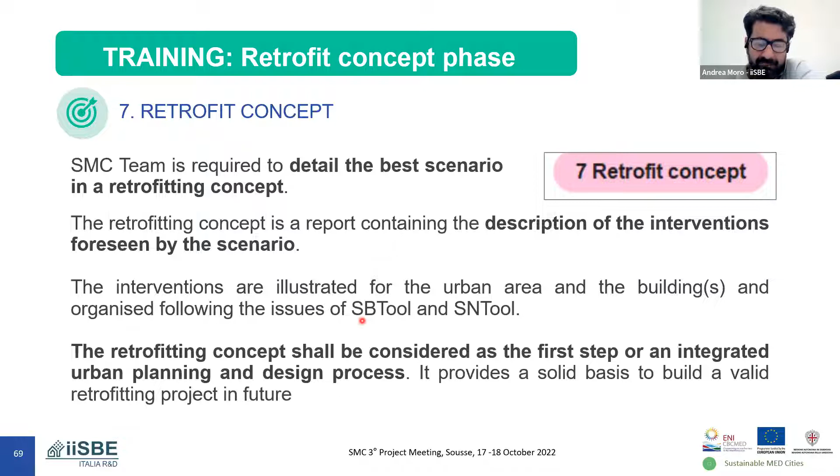And the final step is the retrofit concept. At this point, the scenario is detailed. In this phase, each measure is described, the expected results are declared, the activities and works to implement the interventions are defined, the time scale, a rough budget estimation, the financial scheme to support the intervention, who should be responsible for the implementation, which department, for instance, or agency, what are the partners needed to implement the action, who are the reference stakeholders, and the links of this intervention with future strategies, plans, and programs. So each intervention in the package has to be described in this way.

We are still in the detail in the level of a concept. We are not yet planning. We are identifying the interventions, and of course, when the municipality will decide to implement those interventions, there is a very valid preparatory work to support in a very efficient way the planning of the intervention implementation.